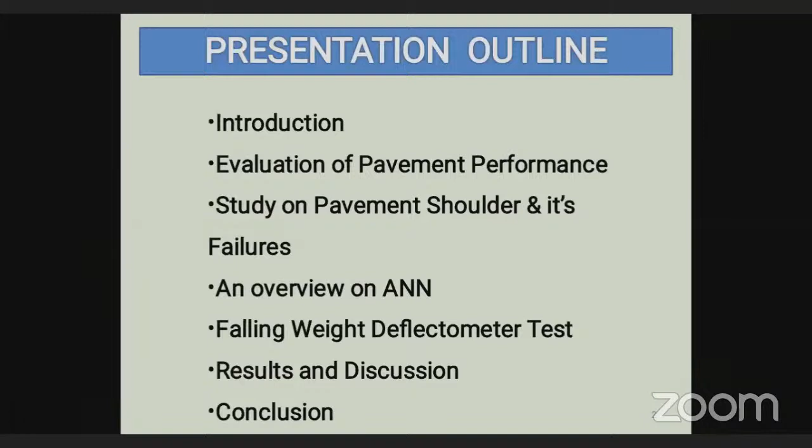Now, as we all know, it's a pleasure to say that India is the second largest country in the world in road network. The total road network in India is around 6.2 million kilometers, and in Tripura the total road network is above 16,000 kilometers.

And if we see the scenario in the rural area, the total road network is around 3.5 million kilometers in India. And in Tripura, the total road network in rural areas is above 10,000 kilometers. But it is very undesirable that the condition of most roads in rural areas is very miserable. Different types of failures are occurring.

of poor pavement performance. Every year, a huge budget is invested in the maintenance work of pavement. You can see here, last year the total budget was around 120 crore in Tripura only for the maintenance work. So this is very unfortunate.

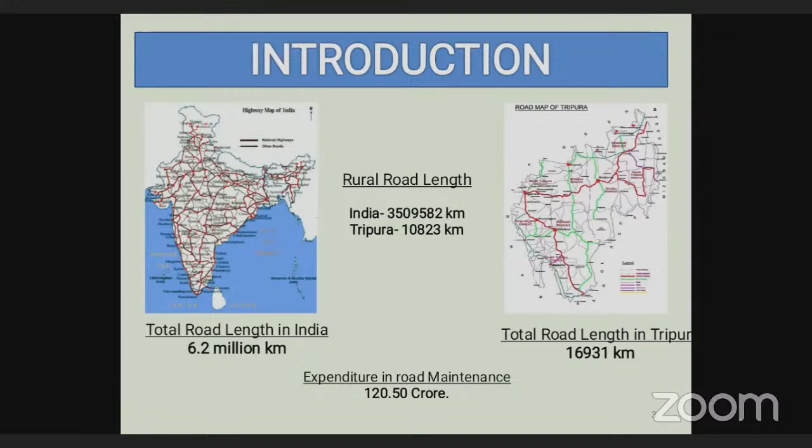Now, what is pavement performance? Condition of road. It includes different types of failures, then riding comfort of passengers, then serviceability, the overall life of the pavement, then the condition of the pavement, etc.

We can see there are different types of pavement failures occurring on a pavement, like potholes, that means the bowl-shaped depression in the pavement section, then rutting, that is the vertical deformation along the pavement surface, then surface delamination, that is the total bituminous surface is removed in some areas. All these come under pavement performance.

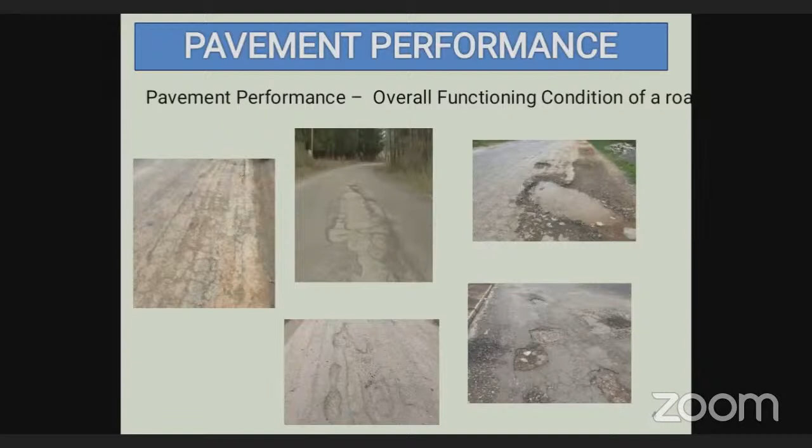So how to measure, how to evaluate pavement performance? There are basically two methods. One is to measure the roughness index. Another one is to measure the pavement condition index.

To measure roughness index, basically we can use different types of instruments. You can see here there are different instruments like a bump integrator, then surface profiler, then Merlin, access profilometer, etc. The first one, bump integrator, is a heavy instrument. The instrument is mounted on a motorized vehicle, and the vehicle is moved along the road surface on which the roughness index is required to be measured.

The instrument is moved along the road surface, and after completion of the total stretch, the total undulation of the road profile is measured digitally through software. In this case, the vehicle is required to operate at a speed of 32 kilometers per hour only.

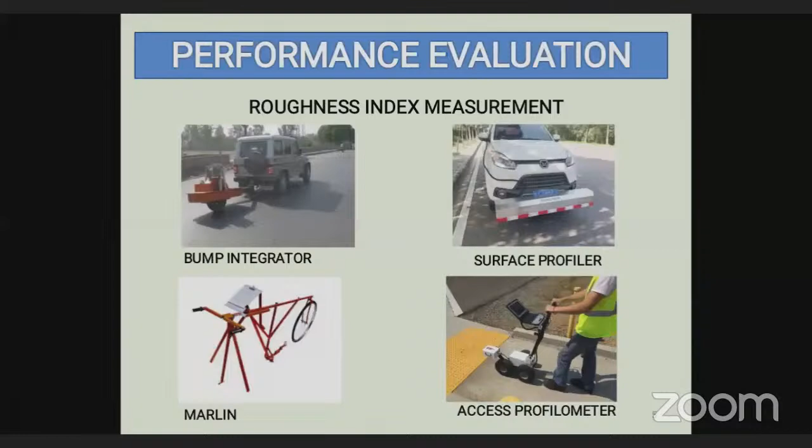Now, test bump integrator instrument. Basically, the bump integrator instrument is required to operate at the speed of 32 km per hour. But practically, it is very difficult to maintain a constant speed of 32 km per hour on a road, because there is heterogeneous traffic, especially in rural areas.

There are different types of pavement failures, potholes are there, then pedestrian traffic is there. So because of that, it is almost not possible to maintain that constant speed of 32 km per hour. That's why one test is there to calibrate the bump integrator instrument, so that we can operate the instrument at any speed and convert the value, that means the roughness value, to the standard speed of 32 km per hour.

So the instrument is operated at these 7 speeds, that means at the speed of 20, 25, 30, 35, 40, 45, and 50. Okay. So total 10 road stretches are taken, and the unevenness index value is calculated for all the speeds, as well as the instrument is operated at the speed of 32 km per hour, and the unevenness index value is calculated.

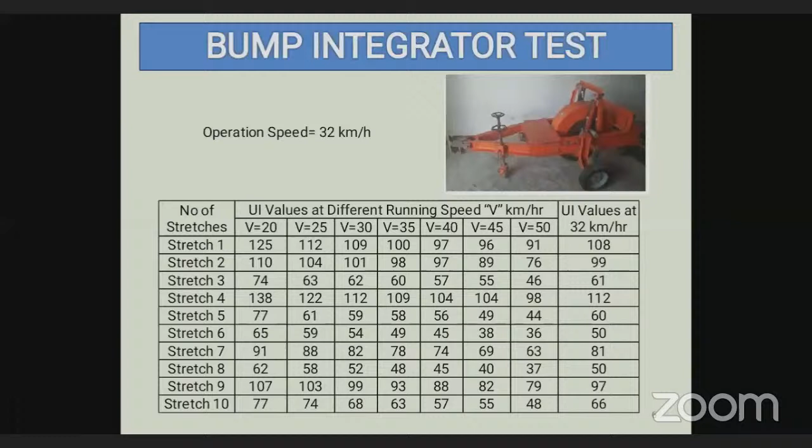And based on this data, some equations are derived using regression analysis to convert the bump integrator value, that means the unevenness index value, from these speeds, that means 20, 25, 30, 35, 40, 45, and 50, to the standard speed of 32 km per hour, because the standard roughness index value is given at the speed of 32 km per hour only.

Now, one generalized equation is also derived using multiple linear regression analysis so that we can operate the bump integrator instrument at any speed and calculate the standard value of unevenness index at the speed of 32 km per hour. So this is one calibration test.

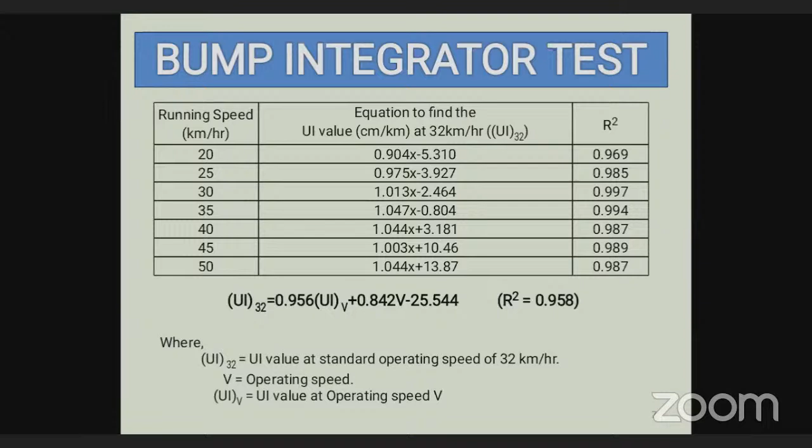Next is distress measurement. That is another method to evaluate pavement performance. Here we can evaluate the pavement condition index. There are different types of pavement failure occurring on a pavement surface, like pothole, rutting, cracking, shoulder drop, etc. I have highlighted here only these four types of distresses, because these four types of distresses are found basically in the newly constructed roads of Tripura. Okay.

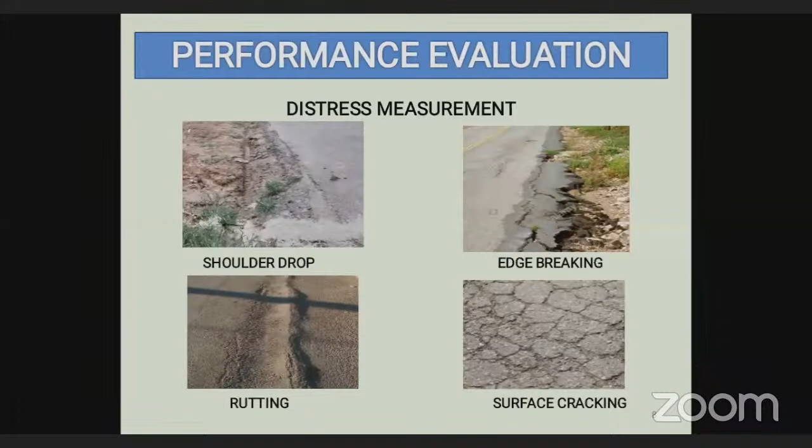And periodical data is collected for a year on some roads, and this data is plotted graphically. It is observed that these two types of failure, surface cracking and rutting, are very minimal at the initial period of data collection. The roads which were chosen were all completed in 2012, and data is collected in 2013 from January to December at a regular interval of 3 months.

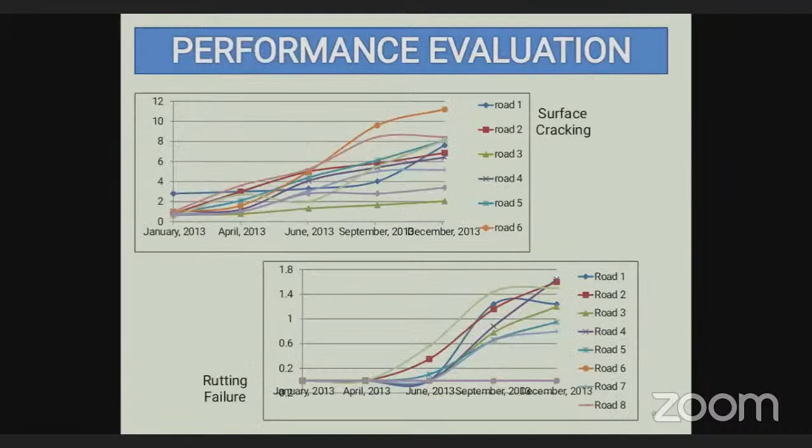Okay. So from this data and from this survey, it can be said that shoulder drop and edge breaking are the first failures occurring on a road. After that, other types of failure, that means surface cracking and rutting, occur, and pavement deterioration occurs. So shoulder drop and edge breaking are the first two failures which occur in a newly constructed road.

And the survey is conducted in the rural roads in Tripura, in different districts. Now, what is the cause of shoulder drop and edge breaking? Basically, in a pavement which is constructed with 4 layers: subgrade, subbase, base course, and surface course. When traffic wheel load is applied at the edge portion of the pavement section, one lateral pressure is exerted in the shoulder section, and in most roads, the shoulder section is untreated. That means the earthen shoulder is provided in the rural areas.

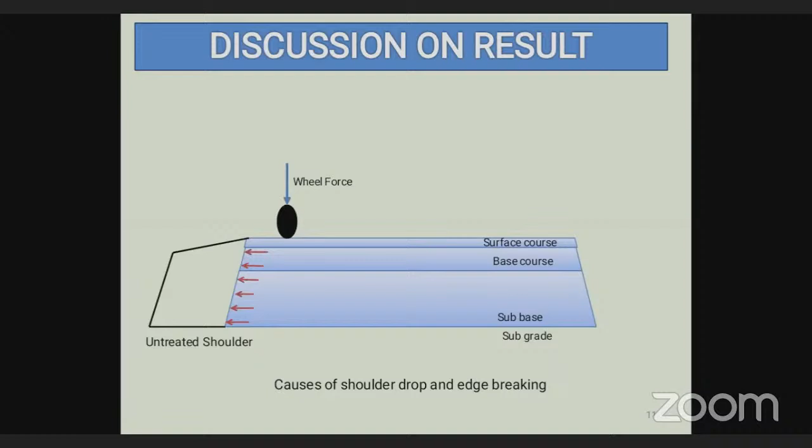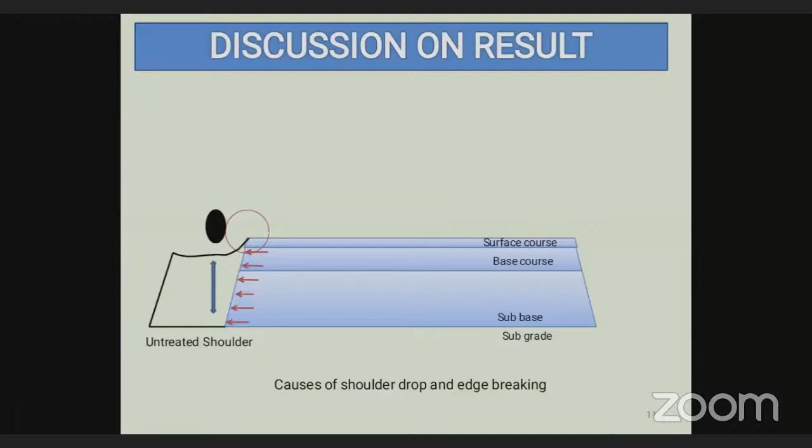So if the shoulder is untreated, it cannot resist this lateral impact of the wheel force. Again, it is often observed that the wheel is moving along the section which is untreated and uncompacted. In that case, the material of the shoulder section gets deformed and settled, and thus this corner portion gets supportless, and in this way the shoulder drop is occurring. That means the shoulder drop failure is occurring.

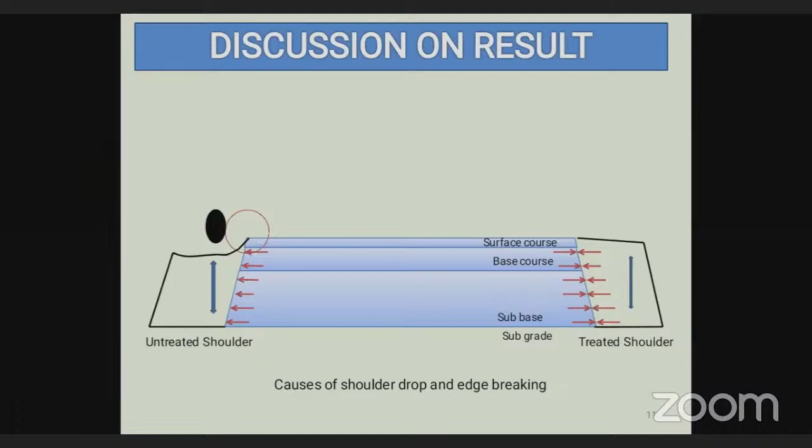Now, if we can replace this untreated shoulder by a treated one, it can resist the lateral force, the lateral impact of wheel load, and the total deformation can be reduced. Now take a look at the pavement shoulder section.

What is pavement shoulder? So pavement shoulder basically is the extra passage provided along the pavement surface, adjacent to the pavement surface. It serves different purposes, like it acts as an emergency lane. Then in some areas, especially in the other district roads, it sometimes acts as a temporary parking spot. Then in rural areas, it acts as a pedestrian passage. Then structurally, it provides lateral support to the pavement section. So it is very important to maintain the pavement shoulder, because it serves different purposes, and structurally it also has a high impact on the pavement performance.

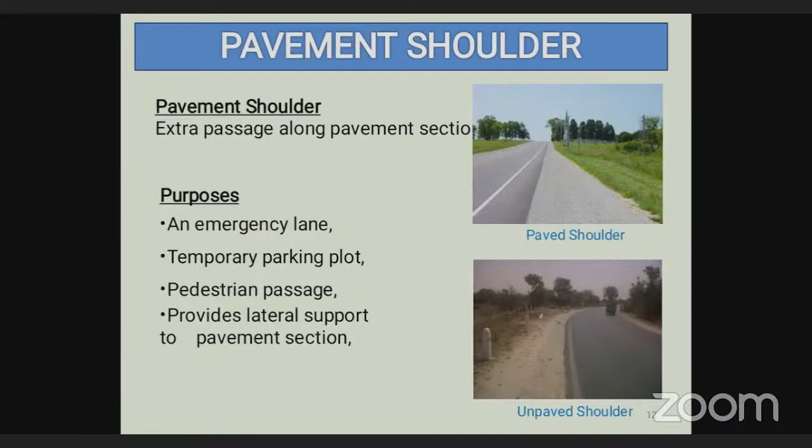Now, what are the shoulder failures? There are different kinds of shoulder failures that occur on the pavement shoulder section. First one is surface depression. This is the vertical deformation occurring on the shoulder section. This type of failure can occur due to application of heavy traffic load on an uncompacted or untreated shoulder, then inadequate compaction of the shoulder section.

Generally, we can see during construction or maintenance of a road, the pavement section, that means the blacktop portion, is specially focused on and compacted perfectly, but the shoulder section is often neglected, though it has a high impact on the overall performance of a road. So this shoulder section also needs to be compacted. This type of failure can accumulate rainwater, and further this rainwater can percolate through the layers of the pavement, and the total pavement section can be structurally damaged.

Next is bush covered area. In many road sections, especially in rural areas, it is observed that the shoulder section, that means the earthen shoulder section, is totally covered with small plants and bushes. It is required to be maintained properly. This type of failure occurs due to improper maintenance work only. The root zone of these plants can enter the pavement layers, that means the pavement structures, and small cracks can occur. So this is also one type of failure in a shoulder section, which affects the overall performance of a road.

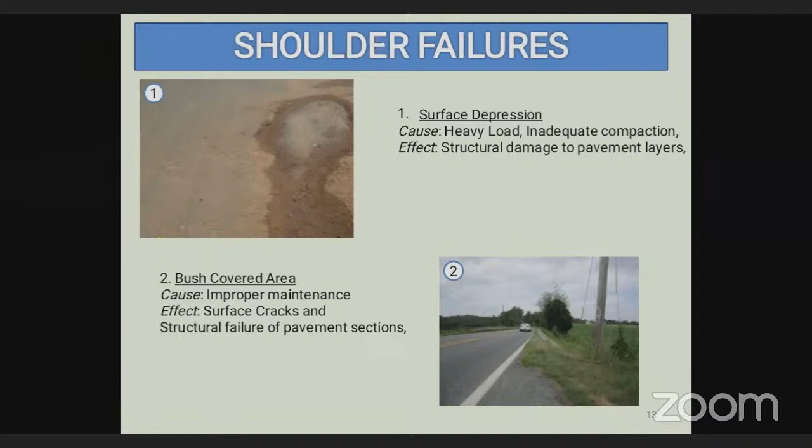Next is shoulder drop. As I have said earlier, the shoulder drop is the elevation difference between the pavement surface and the shoulder surface. It is also called shoulder failure, and it occurs due to inadequate compaction and application of heavy traffic load on the earthen shoulder section. It further creates different types of pavement failure like edge breaking. It also causes severe road accidents.

So next is shoulder rutting. Rutting is one failure that occurs in the pavement surface as well as in the shoulder surface. And the cause is almost the same, application of heavy traffic load, due to which vertical deformation occurs in the shoulder section.

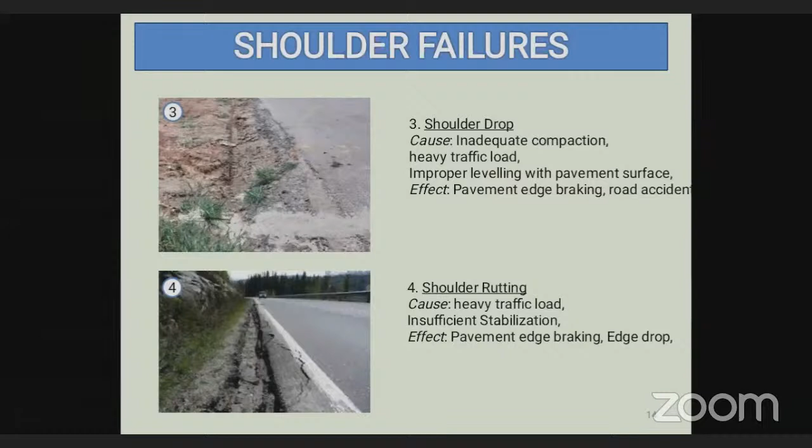Next is insufficient width of shoulder. As per IRC, the width of the shoulder should be around 1.8 meter, but in most roads, especially in rural areas, sufficient shoulder width is not maintained. So this is one type of failure, because the shoulder section provides lateral stability, and if the width of the shoulder is not sufficient, it will not provide a sufficient amount of lateral stability to the road pavement section.

So next is improper cross slope. The cross slope in the shoulder section should be almost the same as the pavement section. But in many roads, it is observed that the proper cross slope is not maintained. Again, in some roads, the cross slope is formed in the opposite direction, that means towards the pavement section. This is formed due to the formation of surface depression, rutting, etc. In that case, it can accumulate rainwater and the total structure of the pavement can be damaged. So this is a severe type of shoulder failure.

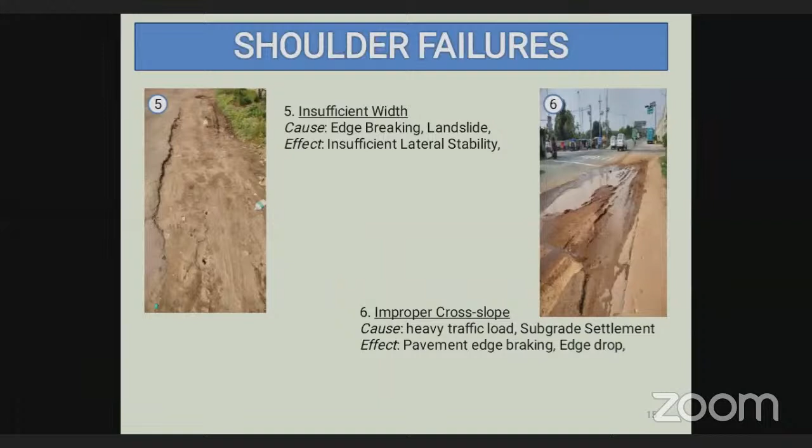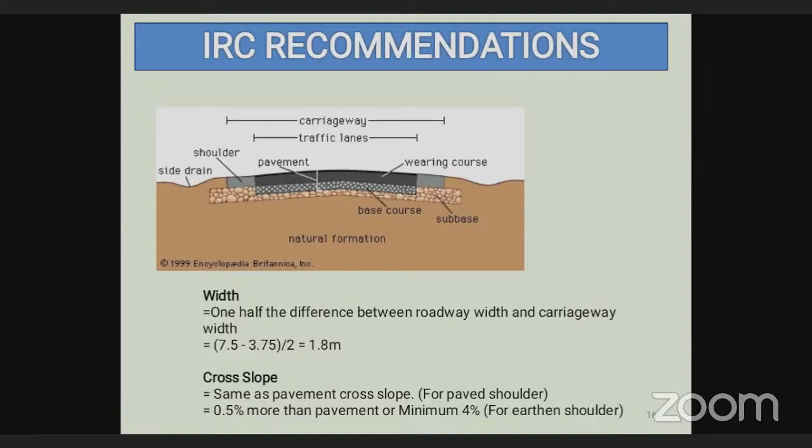So it is very essential to maintain the shoulder section as it has a high impact on the overall pavement performance. Now, this is one procedure to evaluate the condition of shoulder, that is the shoulder condition index. Basically, to determine the condition of a pavement, usually we use pavement condition index. That is a prioritization rating system. Basically, it is maintained for the pavement section only, based on different types of pavement failures.

As the shoulder section also has a high impact on overall performance, it is also required to measure the shoulder condition. Okay. So a prioritization index can be determined in some rating from 1 to 10 or 1 to 5. Here, this is one result of one investigation where the shoulder condition index is given at a 1 to 10 rating,

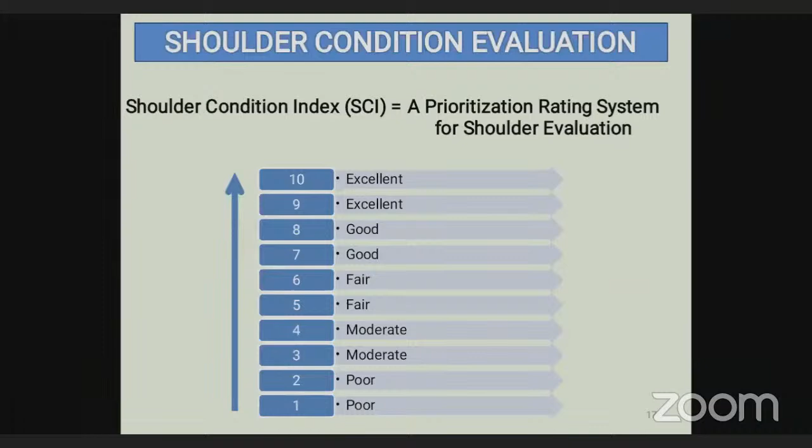and these are the visual observations based on which the shoulder condition index is given from 1 to 10. For rating scale 10, that means the excellent scale, there will be no visible deficiencies and it will be properly leveled and well maintained. For rating scale 9, there may be some slight discrepancies and the leveling should be proper and well maintained, and so on. The road sections can be scaled from 1 to 10.

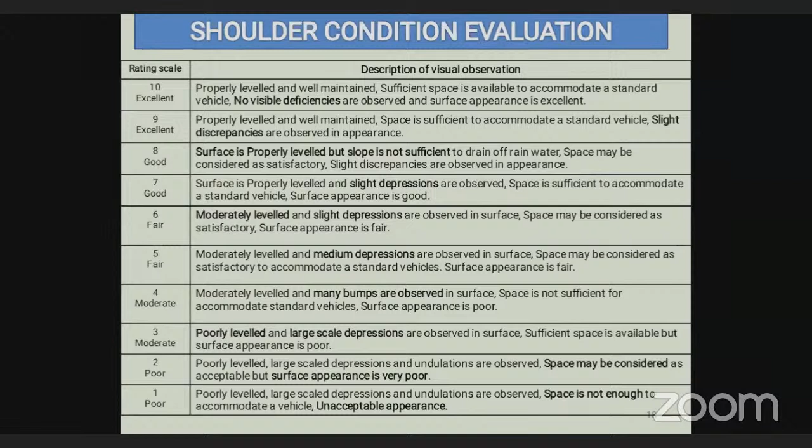Now, this scaling or shoulder condition index can be evaluated or analyzed using artificial neural network also. Here is one application of artificial neural network. So first of all, let's have a discussion on what is artificial neural network. Basically, the concept of artificial neural network comes from our biological neural system. In the biological neural system, there are three parts in one neuron. That is dendron, the neuron or neural cell or nucleus, and the axon.

Dendron collects information from the adjacent cells and transfers it to the central neuron section. And the neuron processes that information and passes it to the axon. And the function of the axon is to collect the processed information from the neuron and transfer it to the adjacent neural cell.

The same concept is applied in the artificial neural network. Here also there are three layers. One is the input layer, then the neuron or central node, and the output layer. Okay. The input layer is the input parameters. That means the known values of an equation. Then the central node evaluates or processes the information through some mathematical algorithms and gives one decision, that is the result. And we get it through the output layer. So basically, this is the function of artificial neural network.

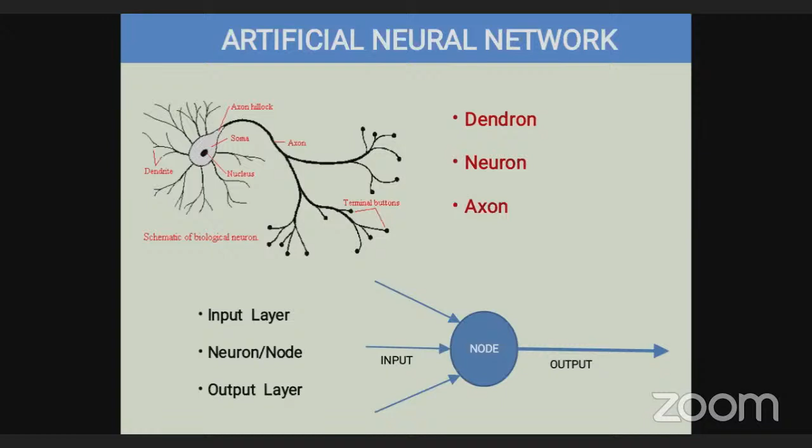So there are different softwares on artificial neural network. In artificial neural network, yes, there are three layers: input layer, central node, and output layer. In the input layer, there are different types of mathematical tools. There are different softwares. In each software, there are one or multiple mathematical tools customized in the software. So based on our problem statement, we have to choose that software.

There are different software like JustNN, EasyNN, Alyuda forecaster. Then fuzzy weight NN, that is based on the fuzzy logic system. Then MATLAB. In MATLAB software also there is a toolbox of artificial neural network. Then DarkNet, Neuroph, then Neural Designer, etc. Many more softwares are available in the market. So based on our problem statement, we have to select the software, select the mathematical tool, and based on this, artificial neural network is conducted.

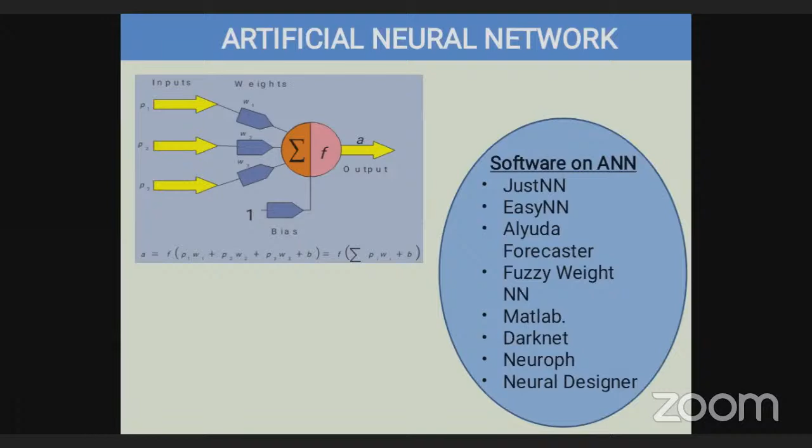So here is one analysis, one example of artificial neural network through which the shoulder condition index is evaluated. Here, the input parameters, that means different types of shoulder failures, 6 types of shoulder failures are chosen and inserted as input parameters. And the output parameter, that is the shoulder condition index value, is evaluated. In this case, EasyNN software is used.

And the training algorithm is quick propagation. This is one trial and error based analysis. In this software, there are 3 to 4 mathematical algorithms customized: quick propagation, back propagation, feed forward, etc. And by conducting the trial and error method, this best fitted network is developed. So using this network, it is possible to calculate the shoulder condition index based on these particular types of failures.

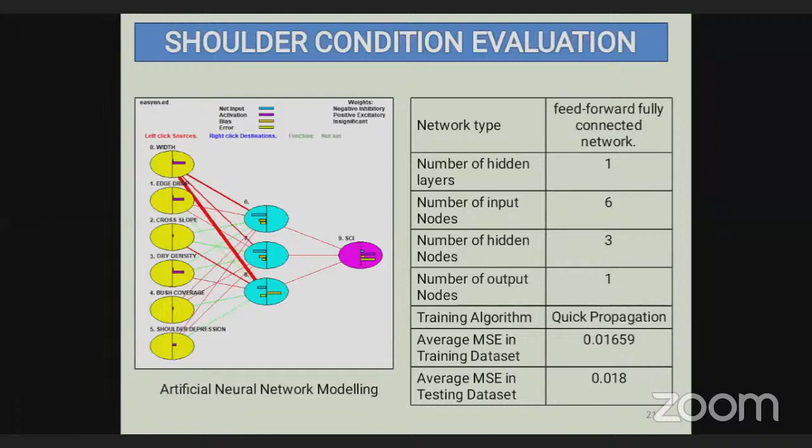So parallelly, in this software, another analysis is performed, that is sensitivity analysis. According to this analysis, the impact of each shoulder failure is calculated. So it is observed that the edge drop or shoulder drop has the highest impact on the shoulder condition index compared to the other failures.

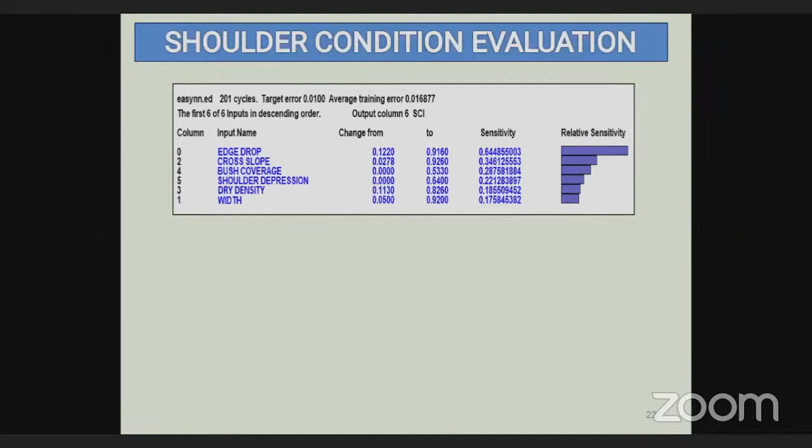Again, one equation is derived using regression analysis to calculate the shoulder condition index based on these 6 types of shoulder failures. This data is based on one survey in the rural roads in Tripura. Basically, these 6 types of shoulder failures are found and, collecting data of these 6 types of failure, the shoulder condition index is calculated.

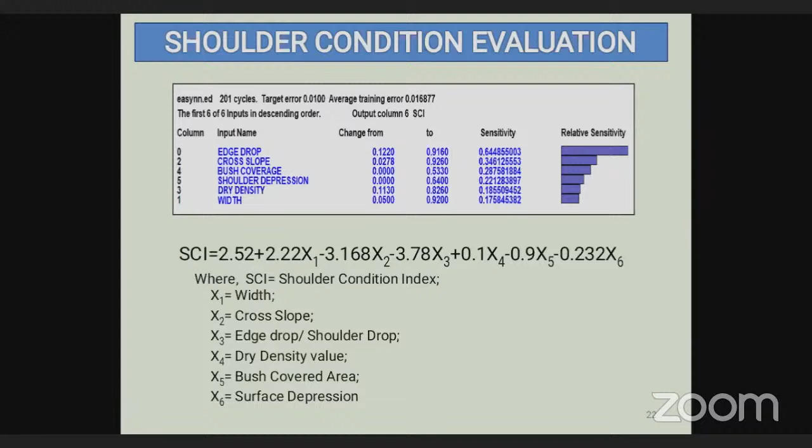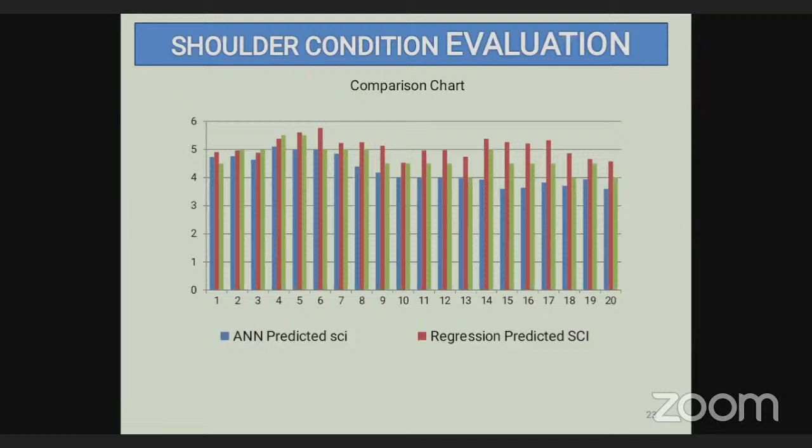So this is the comparison chart of ANN predicted shoulder condition index, regression analysis predicted shoulder condition index, and the actual value of shoulder condition index that is performed by visualization. Okay.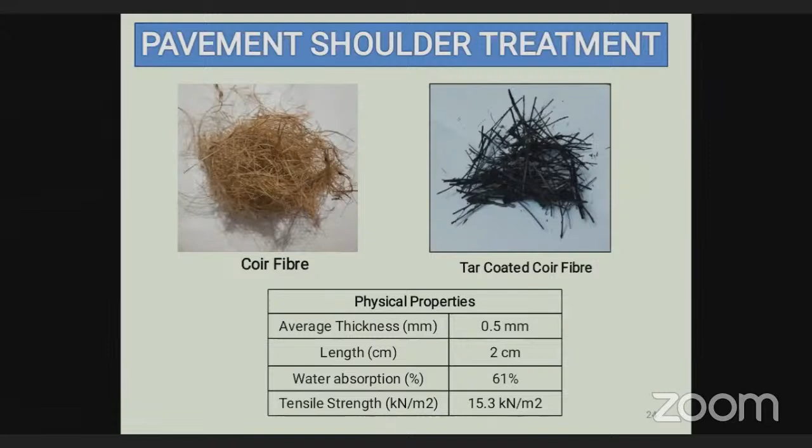So these are the engineering properties of the sample, both the untreated sample and the sample treated with coir fiber. Here we can see the maximum dry density can be decreased from 18.1 to 12.24. Then optimum moisture content, 12.9 to 16.9. Then soaked CBR can be increased from 4.5 to 7.35.

Unsoaked CBR is 8.25 for the untreated sample and 11.92 for the coir fiber treated sample. Then unconfined compressive strength is 630 kilopascal for the untreated sample, and 695 kilopascal for the coir fiber treated sample.

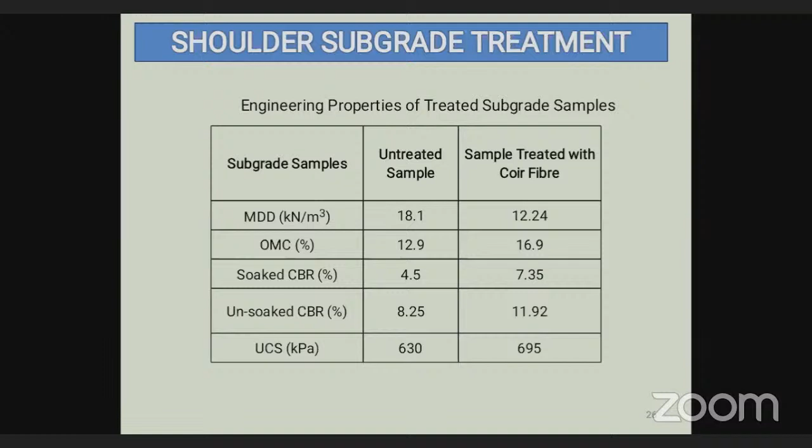Next, there are some laboratory experiments conducted to evaluate the vertical deformation in the shoulder section, both for the treated and untreated samples. So basically, the wheel tracking test is conducted to determine the rut deformation. Here, there is a wheel in the instrument which is moved over the sample. The sample is prepared like this. The picture is shown here.

First of all, two circular samples are prepared and one portion is cut from each of the samples, and the remaining portions are attached, and the wheel is moved at the center portion of the sample. So after a certain number of revolutions of the wheel, the total deformation is measured. That is considered as the rut deformation in the sample.

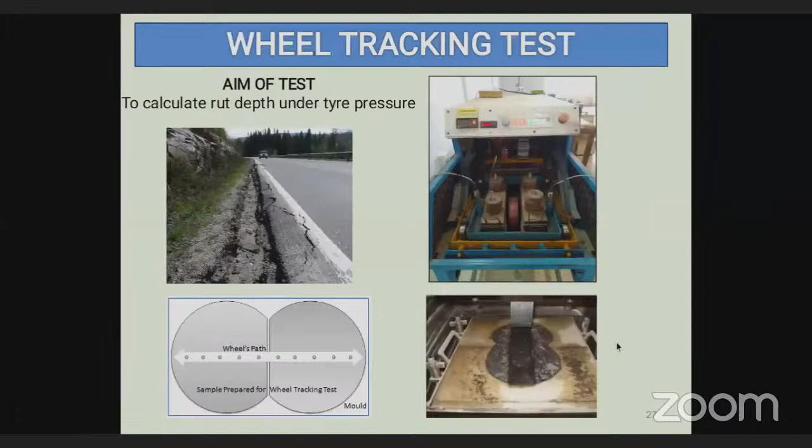So the test is conducted, and the data is collected for both the treated sample and untreated sample. It is observed that the rate of deformation is around 0.46 for the untreated sample, and 0.32 for the coir fiber treated sample. And the deformation can be reduced by 29.06% after treating the sample using coir fiber.

And the stability is 180.96 cycles per mm, and that is 255.1 cycles per mm for the coir fiber treated sample. So the stability can be enhanced by 40.97% after treating the sample with coir fiber. Here is the graphical representation of the data. That means the vertical deformation we can see here.

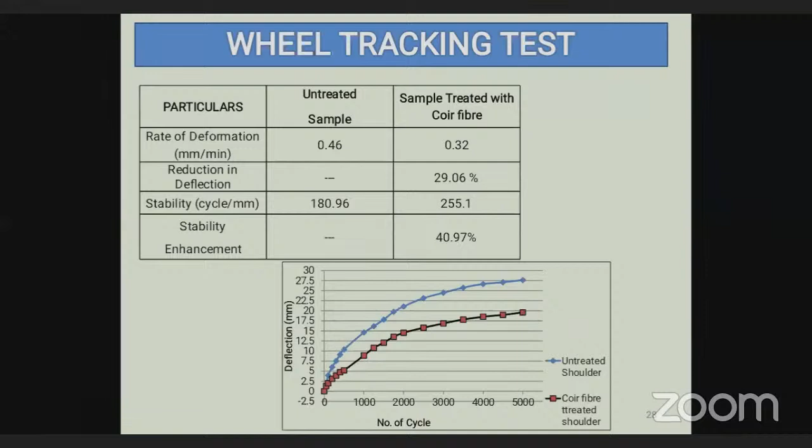So next, another test is conducted, that is the falling weight deflectometer test. This test is also conducted to determine the vertical deformation in a road profile. There are some geophone sensors mounted with one beam connected to the instrument, and through these geophone sensors, the vertical deformations are measured at different points.

There are 7 geophone sensors. The first geophone sensor is placed below the axle of the wheel. Then the other geophone sensors are placed at a regular interval of 0.3 meter.

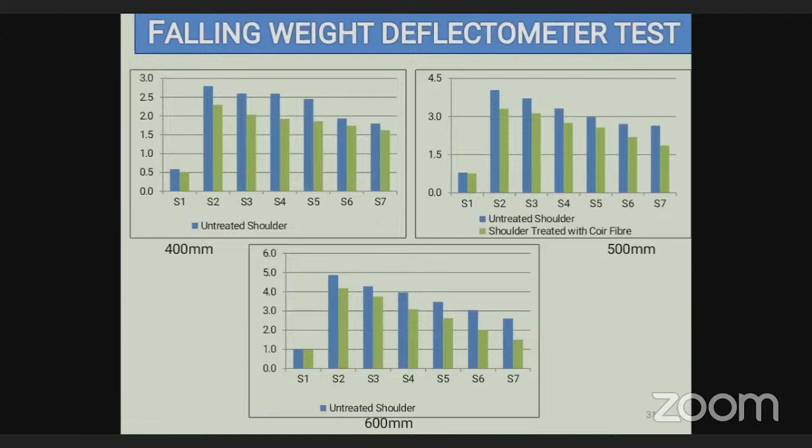For other conditions also, a similar type of graph is observed. And this is the data. It is observed that the total vertical deformation can be reduced by 34.54% when the load is applied from 300 mm height.

Then the maximum reduction is 29.76% when the height of fall is 400 mm. Then the vertical deflection can be reduced by a maximum of 25.80% when the height of fall is 500 mm, and for the last case, it is 36.02% maximum value, which can be reduced for 600 mm height of fall.

So basically, the vertical deformation can be reduced by 25.8 to 36% if we treat the shoulder materials using coir fiber. So this is the thing.

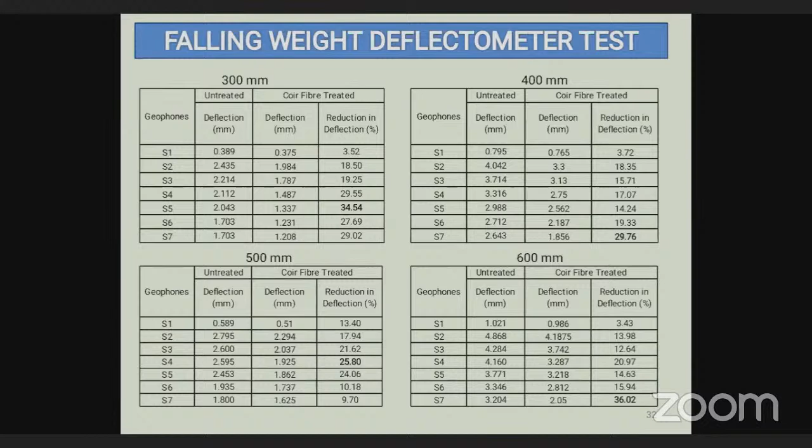Now these are some concluding remarks. The major shoulder failures observed are surface depression, bush covered area, shoulder drop, insufficient width, rutting, etc. Then the shoulder section is modified using coconut coir fiber coated with tar to increase durability. Then ANN, artificial neural network, can be used to determine the shoulder condition index, which is essential to evaluate the performance of a road.

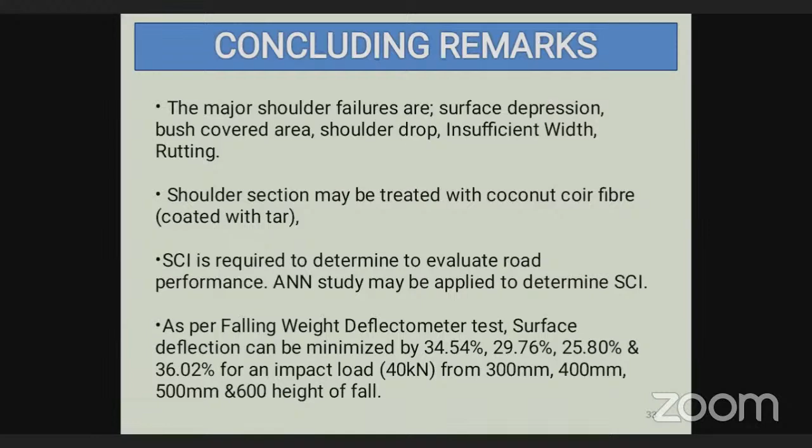Then the falling weight deflectometer test. Using this test, it is observed that the vertical deformation in the shoulder section can be reduced by 34.54%, 29.76%, 25.80%, and 36.02% for the impact load from 300 mm, 400 mm, 500 mm, and 600 mm height of fall. So these are the concluding remarks, some references, and that's all.